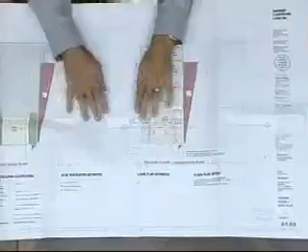We did a couple different stop gap measures. There's a section through here too that also helps explain it, but we met with the landscape architect, Chris Gillian, actually, who's in my building, and he specified the plants for this area on both sides, and there's an additional little lattice wall here that'll help aid the plants as they grow and potentially serve as an additional screening measure.

The shape is basically the same. This shows that the distance from the property line to the edge where you could basically stand is 10 feet 2 inches. The centerline there, that dimension shows 15 feet. That's the setback per the policy guideline that you guys all know about.

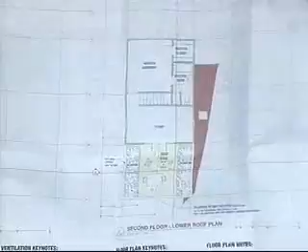Excuse me while I turn. So as you can tell, this is the rear elevation and that is the side elevation, which faces the closest neighbor affected by the setback. And here is the planting area with the plants. These are just CAD drawing plants, and the wall shown there.

The railing then comes across. The two side walls are just simple walls with the lattice over them. I got rid of the extra railing wall part of it. The lattice could aid both in view restriction, both directions, and potentially for any vines that we might want to grow while the other plants are growing, or in addition to them.

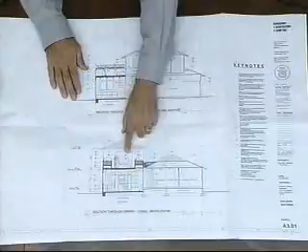But I don't think we need to have the vines at this point. I think the plants themselves are really attractive, and I submitted the pictures of the plants in addition to the names. This section here basically shows a person standing here. There's the lattice, number 18, and the plants up at that level.

Can you say the names of them so I don't... Phormium tenax palmatum, that's the main plant. I think it says 2 to 3 feet high. They're basically a natural-looking xeriscape type plant, surrounded by Arctotis sunspot orange. So it'll be kind of a very natural-looking planting, which actually matches the planting in the rear yard as it is today.

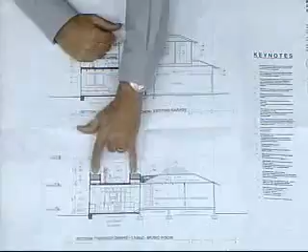So we are putting them on both sides, although this is really the only area we've been talking about the last couple of weeks, to keep this sort of symmetrical off the existing doors, which are located right there.

And this is part of, do we have a plan in this set of drawings, or is this just... That was all he did, I just put his notes on here, and on that page you saw previously.

Anything else for your presentation? That's it. We didn't read the minutes, but effectively you were asked to provide additional information on screening and landscaping, which is what you gave us.

So at this point I'll open up public comment. Is there any member of the public that wants to comment on this project? I don't have any slips, nothing in the files. That's to refresh our memory. Okay, we'll close public comment, and I'll read the minutes.

This project was here two weeks ago. It was continued two weeks to full board with the comments to provide additional information on screening and landscaping proposed at the west side upper level deck. That was really the only comment, we just needed some more information to evaluate it. So I believe we got that. I'll open it up to the board for their questions of the applicant.

Jim? I think, what is, you're calling it a screen? Is it a louvered screen, or is it something a vine can get inside and grow up? It's a lattice. I think I called it out as 2x2s with a 2x4 top and bottom.

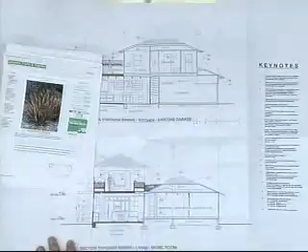Let me see what it says here. 35 centimeters, what was it? 35 centimeters high. Anyone want to translate that? Oh, 35 centimeters is tiny. Yeah, it's really a tiny plant. So I don't think that's... well, that doesn't look like 35 centimeters.

That's why I was trying to figure out how high the barrier was. If you can see right over the top of it, it's to keep you from looking down onto the neighbor's backyard. That's why I designed it as a 2x2 lattice. You can see from the elevation in two directions - when you stand here, you can't see through the lattice in that direction, or vice versa from down below. You can see kind of through it, but you can't see down because of the proximity of the on-center spacing of the 2x2s.

Anybody else? Anybody else? It does say it gets larger later as it grows. Aaron?

I think they've done a nice job with the lattice guardrail. The type of plant I think would be right about there where you could kind of see over it, kind of see through it - sort of a partial screen. So it's 30 inches tall, 24 to 30. What we're trying to prevent is a downward view. If it's right at that level, it should prevent you from looking at a downward angle, and you're pushed back it looks like 6 feet or so from that screen, so there's already an angle established with that sidewall. I think it's acceptable from my point of view, but barely.

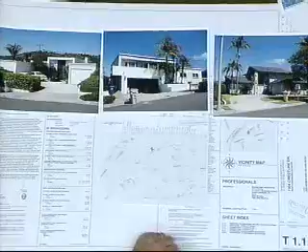That one, which is lovely. I'm just going to, if everybody's looking on here, I can overlap, it's better too. There seems to be a wide variety. I tried to pick all the either mid-century modern with a gabled roof and a large overhang, or flat roofs. Okay, it goes on and on and on.

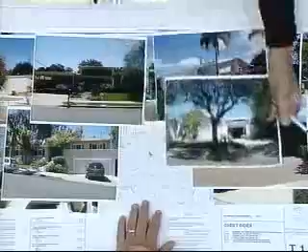Mr. Miller, didn't you ask for this? I did this just for you.

So this last one is, I'm glad this one was last, because this is kind of the direction that we're taking, only I think we're doing, in my opinion, a nicer job of it. Okay, so that's that issue.

As far as the detailing, I brought in some preliminary details, and they also show a couple of the parapet wall details. If you go to the elevations, I want the colored elevation to be over here. Brian, if you could move that one down. Not that that's the color, but I'll go over the color differentiation in a second.

But on the second page of the elevations, I took off the trim at the top of the parapet because I just thought it would be cleaner if we didn't do a cap trim and just keep it real clean. So that's one change I did make, and I just want it to be a clean plaster detail to the parapet. There was a double line here before, and an extension, not a crown, but a very simple rectangular extension that I think would be cleaner without.

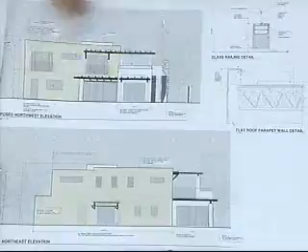This is just a preliminary, these are preliminary details, but I'll show you a photo of this detail. It's where we have the 12-inch glass railing over the plaster wall on the front of the house, and also around the side of the house. And now might be a good time for me to show you.

This is a house we just finished in Montecito that has some similar detailing. And this was brought up when I came in before, about somebody maybe not quite seeing my vision for this house. So I called this particular style, for lack of a better term, a Beeson contemporary Mediterranean. It's a flat roof Mediterranean. So the detailing of the trellises is very simple and clean.

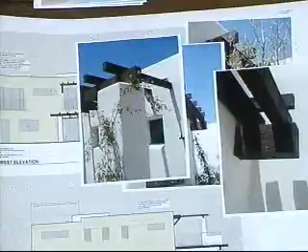Here's one that would be similar to the type of detailing that we want to do. And maybe, Brian, it was you that asked how do I visualize what inspired the detailing? I can't remember who it was, but I think it was you. Then here's one where the plaster columns are just very simply detailed with a bullnose. And the eaves, this one has an eave that actually cuts in, but mine wouldn't, it would be a bullnose detail at the top.

Here's a detail looking down at that trellis. And here's a kind of a typical wood railing with a brushed stainless railing and support. This is an example of if you'll notice, I have folding door units that go back. And then so the back of the house would be a folding door system like a lift and slide or a folding door system, and it would be a dark brown to pick up on the brown of the trellises of the stain.

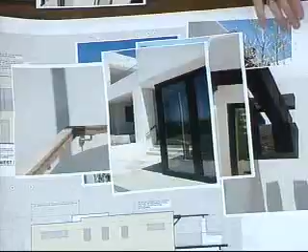This is a detail of how the track lays into, in this case, a stone wall, but in our case it would be a plaster wall. It's a real clean detail with a space between, and then again a real clean rectangular brushed stainless cap. Here's a close-up of that track, and then here's a close-up of the end of that detail, of how that works. So this is the direction that my final details will go. I hope that answers that question.

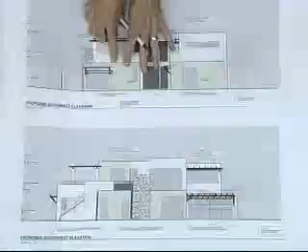I was looking at different ways to break up the plaster color, and I thought there was an opportunity, not with yellow - it just didn't print right. What I picture for this color is a mid-tone, cooler, earth tone brown, not a warm muddy brown, but more earth tone, not real dark, just a mid-tone range, offset with white.

But I kept the center section as a full, dominant white piece. This is an opportunity for my garage element to wrap.

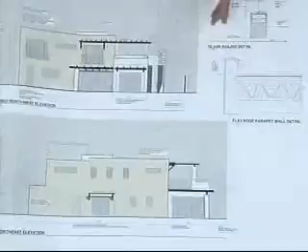As this garage element wraps around - this is the front - as it wraps to the side, it can pick up on this and kind of make this side of the house disappear. As it comes around to the back, it's the same corner and it wraps, then ends where this piece pops out again in white. So the front would be a combination of darker and light, and the back would be a combination as well. The darker tone might also make the house not appear so large on the lot.

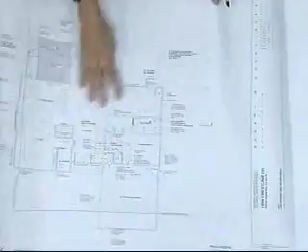What else can I say? Oh, the back elevation - since we're here, before I had shown you a couple of trellis details applied similar to these on the back of the building, and some board members felt the back was a little stark, so we introduced a trellis element at the corner, picking it up from the upper level deck and extending it over this piece in the same line. This one was always here, but you can see on the plan that we picked it up here. It also makes a really nice transition because all this area opens up, so now this becomes an outdoor dining room that all flows together. It worked out really well for us.

The only other comment, I think, was that we expose the corner instead of having a wing wall here - that element from the front - we expose that corner of the deck for the master bedroom. I think that was it.

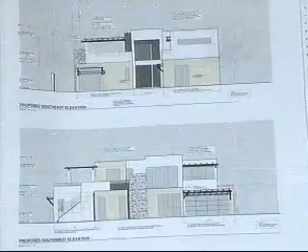What's the thickness of the walls? Are you rolling the plaster in? Will we have the windows, like the long strip window there? It's an existing wall, and we're just going to be retrofitting new windows - there's not a lot we can do there, but we're going to do the best we can. We'll get a bullnose, but it won't be a thickened wall, a really thick wall.

Duncan, are those details applicable to this project? Yeah, they're preliminary, but I can show you the direction of the lighting - step lighting, downward facing, up under the eave of the second story above the entry would be a recessed fixture, and then on the back, a downward, real simple anodized aluminum, dark to match the windows and doors, and stone veneer.

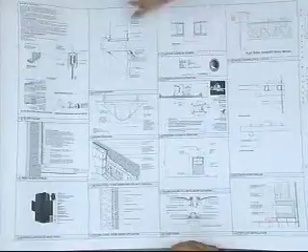The windows are just a standard thickness, so they would basically have to reframe this whole house if we were going to get a double thick wall, and we don't - they just can't afford to do that. But is it just a bullnose edge on it, or? It would be a bullnose, and we'd set it back as far as we can. Okay, yeah, it's flush to the interior.

Scuppers - that shoe for the railing, the preliminary detail here of the roof - even though I'll have another detail at the base, an overflow scupper, I have that detail. Also, we did it on here.

Additional questions, Aaron? Yeah - what were you thinking about the window trim color? The dark brown, to match the trellis. Okay.

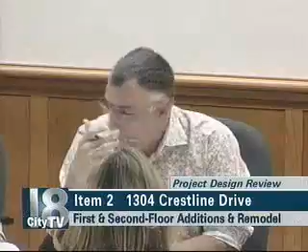That second floor deck tends to recess back with the building wrapping around it, so it'd be different if it was projecting out. I think it works very well in plan. All right, thank you.

Anybody else? I agree. Denise? Okay, I agree. I think it's a good building and an improvement over what it is, and it definitely has precedent in the neighborhood. I agree with the majority of the board. I think it's a successful project.

I think the applicant has done a good job of refining the design, and I'd be looking for a motion, hopefully for project approval, or another motion. See how that floats.

I'd like to make that motion. Yeah, for project design approval. It wasn't very convincing. Okay, I was waiting to see if anyone else would.

I'd like to make the motion for project design approval with the comments that we will await the Tier 2 stormwater management and see how that ties into the landscape plan.

Okay, making findings for NPO? And I'll make findings for NPO that the quality of materials, the mass, bulk, and scale is appropriate to the neighborhood.

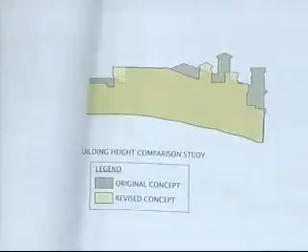The overall natural grade at the south elevation—what we're doing is proposing to raise part of that southeast corner about 12 inches in natural grade.

Can you actually point to the things you're talking about? Because we're not seeing any of the diagrams that match what you're describing. Do that right now.

Starting at the north elevation, what we've done is re-looked at the proportions of the north entry element and studied the horizontal line at the ridge. Those are two items that were brought up. We talked about bringing down the mass at the northwest corner of the building so it wasn't so imposing on the neighboring side. So those are the items that we looked at and reduced.

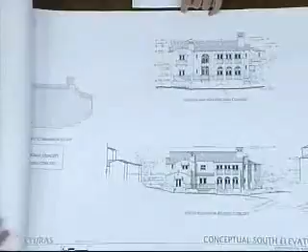I want us to focus on the south elevation. I think that's the elevation that really was being looked at last time we came through. So what I have is at the top the elevation we brought forth last time we met, and then the revised elevation below.

What we've also done is a site visit once more, and we took some grades off the existing neighboring property and illustrated what those approximate finished floors were for those grades, just to give some relevance to how the house would sit on the site relative to scale of the neighboring properties.

But some of the things I was talking about was taking the two-story gallery space and breaking that down, providing some relief at the lower level by providing a roof line—stepping back this element here on the upper floor, to here.

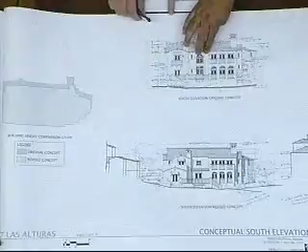The other thing that we did was reduce the amount of deck area at the southwest corner to give a bit more privacy to the neighboring property.

We've also looked at the two-story face at the southwest corner. That was another area of concern, I thought. What we've done is try to step back the southwest corner—you'll see it in the west elevation as well, how that is articulated. But I think it gives a nice facade for the neighboring property to look at. Primarily, it's looking at a one-story face in that section, and I think we were successful in doing that.

And then lastly, the item about raising the natural grade. I think the other thing we were looking at was making sure we didn't end up with too much exposure at the base of that foundation. So we looked at potentially raising the natural grade at the southeast corner up a bit, about 12 inches, just to get that corner—I think that's the corner that's probably the most affected in terms of exposure. So raising that up, using some planters in that section, just to try to bring down the scale as well.

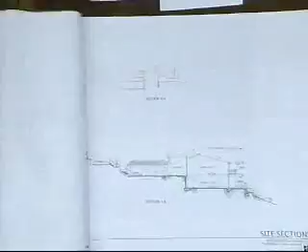We talked about the north elevation. We've also provided a site cross section in the drawings to give you context of how the home sits. It's section B, showing how far down the site we're locating it and its relationship to the elevation of Las Alturas Road.

In terms of visual impact, the home sits far enough away to provide privacy for our client while still maintaining the views. Lastly, we put quite a bit of research into neighborhood compatibility, which you'll find in the last three sheets of the set.

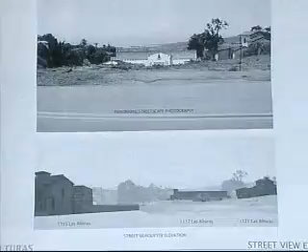We looked at updating the silhouettes you've already seen regarding the neighboring properties and what we're proposing. We did more research showing the footprint of the home relative to the site property boundaries and the FARs of the neighboring properties. We went onto the county assessor's website, took the areas presented there, and plugged those into the FAR calculator your city provided, giving a glimpse of compatibility.

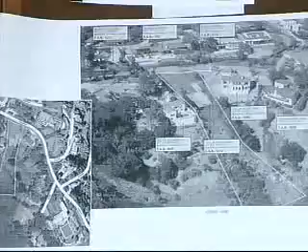One thing that stands out on downhill sloping lots is that the slopes are severe in some areas, which forces the design to be as compact as possible rather than spread out, so it can actually be built. The slopes range from about 30-40%, so we tried to avoid a footprint that was too large, which would require a lot of stepping on the building.

The next sheet shows another perspective, primarily focusing on the three homes where neighbors had concerns last time. For example, the neighbor up on the hill was concerned about whether he'd retain his view with our proposed home, but you can see his view actually gets better. Looking at both 1105 and 1121, those neighboring sites, and the compatibility of where the home sits relative to those properties, I think we've done what we could to make it compatible.

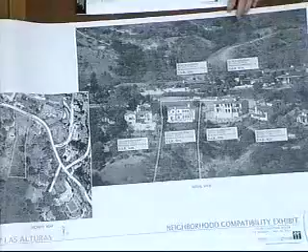Lastly, we superimposed the south elevation with the revisions to show the two-story face as a bird's eye would see it. This really faces the ocean, so the pedestrian view is mainly from the north on Las Alturas. I think it's very compatible, and the FARs are consistent with the neighboring sites. I'll leave it at that, and I'm here to answer any questions. There's a lot of information.

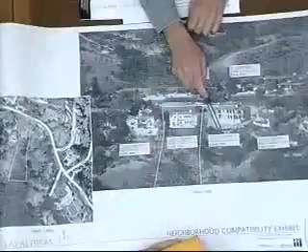Thank you. If I can take two seconds to finish up the square footage, we've reduced down to 4554, which is lower by a couple hundred square feet than both of the adjacent lots. I know that may not be ideal, but we are interested in being compatible with this side of the street because of the lot sloping down. Our client was very interested in primarily single-level living, with a master bedroom on the main floor, a great room, kitchen, dining room, and a library. Below that is square footage for secondary uses, but really you're trying to design the best first floor possible, and then underneath you can reduce square footage, though it wouldn't necessarily reduce the FAR. So really we're just trying to design the best home for the lot.

We've made efforts to address the comments that were brought up last time. So thank you, thank you very much.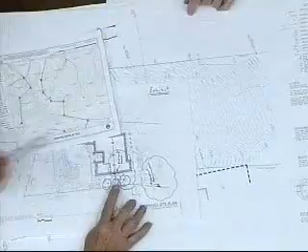If you could just continue your comments. The easement documentation they now have on file comes from 1121 over to 117, and it comes under the building envelope. They also have an easement for this section of the pool wall here. One of our main concerns is having the house located so far down the hill really imposes on the pool area that exists here for the neighboring property.

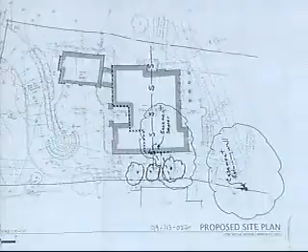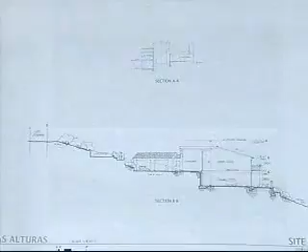So one of the solutions we'd like to see is just having the house move back up the hill a little bit. Also, if we go to section BB — it looks to me like this is the existing grade that's here? Yes, is that right? Yes. It looks to me like there's a lot more than a balanced cut and fill coming out of the property.

I think the new calculations show that it's almost a balanced cut and fill, at least from what I saw at a glance — I could be wrong. Okay, we'll check it out. Thank you, we're going to move to Gil Garcia.

Gil Garcia — I just continue talking on the same property and the concerns I have. Go back to that site plan we were looking at, or the site plan with... we saw a plan.

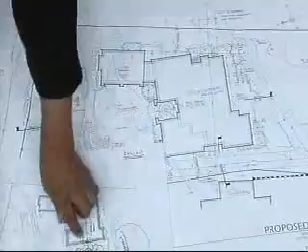They plan to come down here with the sewer line, I guess, from all the way from here, right, and go all the way down to here and back up. Hold on, we'll ask. Okay. And my concern is that there are some oak trees along here that are going to be almost eliminated by that massive grading requirement. Yeah, so they're coming out here, they're going to rip through these trees.

I'd like to have them also look at public works and bring you perhaps a feasibility study of that even happening, because we think this is only about 6 feet deep in here from a map I saw, and I couldn't see the one that came across here when it came down. But it looked like these might be 6 feet deep. If you go down here and then it drops dramatically, and then you try to come back up here, you may have to pump it up — I'm not sure.

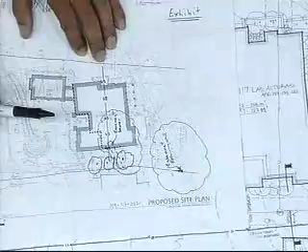To make that connection back up here again. But all of this in through here, this area is very steep, so you're going to be scarring the hillside dramatically, and that's going to be very visible from down below, a scarred hillside making that move.

So we think this is all necessitated by the fact that you're having to move this, but even the feasibility, you're going to this person's property, and I guess you've got permission, but they may have to go into this person's property. They were supposed to have talked to this person and never did. That was one of your recommendations. They haven't done that, so she's still waiting for a call and a sit-down to talk about these issues.

This is a major concern, and the grading continues to be a major concern. But I think the mass bulk and scale issue, even though it's less than this, the fact that you're building at the narrowest portion of the site gives it a very massive look. Look at the elevations again here.

Gil, you're going to have to wrap up pretty quick here. I want to look at the design of three projects together, because I think it's very telling. You want to see the last page.

This even has a higher mass bulk scale, but you notice how these elements popped out and make kind of a courtyard look—it looks a lot smaller. This and these two are a bad example of what you don't want to do, and to have one like this next to this, very vertical, gives a major problem.

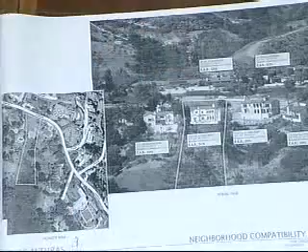All right, thank you very much. Is there any other notes in the file for public record? No? So we'll close public comment and move it to the board for their questions, please.

I think one of the questions is about this easement and where you are in the research of that and the legalities of that. Can you speak on that for a sec? Yeah, should we pull back to the site plan? You mentioned, I think, two easements from what I could gather. One is of course a sewer line easement. The second he mentioned was an easement for the pool retaining wall back here.

So the first issue on the sewer line easement, the topo we have, which we've had looked at several times, is that the manhole is on our property, and we have worked with the wastewater manager as well as looked at the heights of the manholes. By proposing to move the manhole down the hill, we have more than a 2% fall from this inlet to the adjacent inlet, so we won't have to pump, and we do meet the city's requirements for fall for sewer. I don't think we have a problem in terms of honoring the easement for the adjacent pool site, so I don't think we have any issues as it relates to the easements.

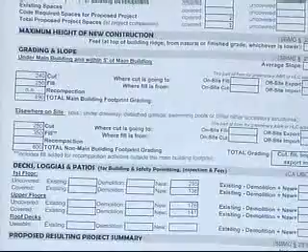There we go. 490 for the cut and fill totals as it relates to the grading under the main building.

Under the main building, and then 600 was a total cut and fill as it related to the surrounding site. Did any of those numbers include any work for relocating the sewer line? Those numbers included up to 5 feet out from the building line, and it included all of the grading.

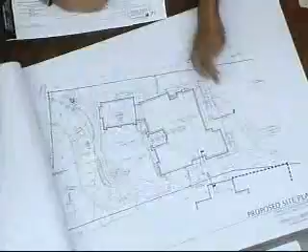The planters, the driveway. The sewer line grading, I don't think we're going to be grading as much. Actually, that sewer line runs parallel with the existing contour. If you look at the topographic survey, there is some grading that's going to happen there. So it's falling down, and this line here is running parallel with the grade contour.

What we've done is we've been conservative, and we've actually proposed a little bit more cut and fill than what we expect on the driveway side, just overcompensating for the overall grading. Let me make sure I understand your question. Did you mean the actual quantities of excavation and then filling back, or were you talking about moving of dirt?

Well, my understanding is that we are required to calculate any movement of dirt, both from construction activities and then change of fill and cut. So it doesn't sound like we've done the cut and fill for the actual excavation. No, I just basically went from all the planters on up to Las Alturas Road.

And then the third item is this oak tree. Do we have a survey that actually shows these oak trees? They're on the topographic survey, first item there. If you turn back one more sheet, there we go.

So what trees are affected by this, all the grading? Well, the easement that exists now, where the sewer manhole exists, is just proposed to be abandoned. We're proposing a sewer easement extension from that existing manhole down to the new location. So in terms of removal of trees, we're not proposing to remove any trees on that site.

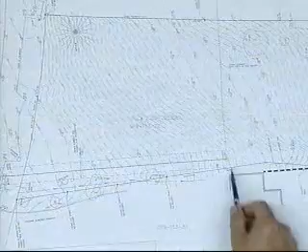Are these trees here? Those are, yes. What are they? Oak trees. They're not even labeled, the canopies aren't shown, they're not labeled. We'll get that done. Other questions from the board?

Sure. Yes, Aaron. On this section, I think it's BB, this is a long tree. There's a low retaining wall at the very bottom of the slope. I don't see that on this one on the elevation though.

This one right here? Yeah, the very low one. Is it, or the plan, would be the south elevation? Yeah. It's this one right here. This one. This also. Oh, okay. So those walls are only on both sides. They're not. Okay.

Additional questions? Bernie? Thank you. One is for Jaime, actually. So you had given us at the beginning of this presentation some things to think about, and now that you've seen it, do you think that we are going to be in compliance with the NPO now with this new plan, and did we take care of the easement issue with the sewer?

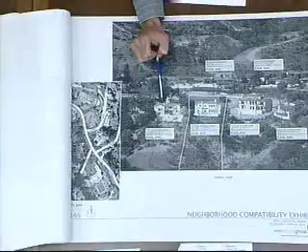Well, if you're looking at this picture, I'm pointing to the home to the left of the proposed residence. This is a home that was built decades ago. So I'm sure that was before your board was in place. 1920s. The home on the other side was a replacement from the fire, and from what I understand talking to the owner, it was replaced very similarly to what was there before. We're not here to say that because we're similar, we're appropriate, but they are existing, and it's important to look at the neighboring properties in terms of what's appropriate. If we built something very small, it would look small comparatively to the adjacent homes. I do think it's important to look at the adjacent properties.

Questions, Jim? I think it's important to contact the neighbor to the west and see what concerns she has. From what I gather, she's more concerned about relocating the sewer line, and I would like to see a drawing showing exactly where the sewer line is going relative to the oak trees. And then I'd like to see a report on what damage that would do to the trees, or whether you'd be able to do that without harming them. A report from an arborist? Yeah, okay, that was kind of a comment.

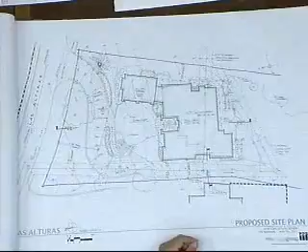Okay. What about heights? Is there... Mr. Chair, I think the main ridge, as viewed from the south elevation, if that were broken up, it would help a lot. It's just straight across there.

We don't have a roof plan, do we? P8. Well, but this is just a simple gable and then the extensions on it. I think the roof plan's on P4. P5. Looking at the overall site plan, actually. So I remember at the last meeting Paul commented there was a break in the ridge, but the design has changed now, so we've got to show that now.

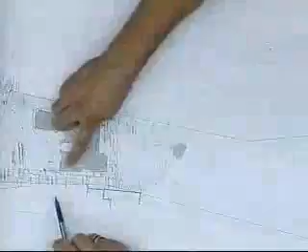But it's a step down, right? Yeah, so it's a main ridge though. You can see the roof's here, and then there's a small gable here, and another gable here at these two lower elevations, and the main primary gable here, and then it steps down. So we do have some stepping, about 5 instances where that roof steps. Okay.

Jim, how are you feeling, since I think you can analyze this volume a little more than Bernie at the moment? Do you feel that this continuous ridge is acceptable, or does it need addressing? I have no problem with the ridge coming across. I think that trying to break it up in some way might make it more...

Looking at the ridge more, I think it's low enough where I don't think it really needs any breaking up. I would agree with Jim. It has a little bit of a drop plate here, it's got a gable shooting in here, and it's got this other piece here that breaks it up, and it's already set low on the site, so it's not going to be in anybody's view angle that I know of.

Mr. Chair, I agree with you both as well. I think there's enough variation in the ridge, and it's lower than both properties on either side. So Jaime, I think that gives a little bit of clarity to the reduction of square footage, and maybe bulk, mass, scale reduction that could happen. I think the applicant is skilled, they've shown it in this project and other projects. We've been in front of our board, so I think he can do a good job there.

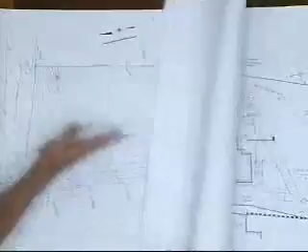I'd like to comment, because you were talking about the square footage. What I was thinking is this is a sensitive area right in here, so this is where I would invite you, reduction of square footage, your primary focus be in that area, specifically right in this area, because of the privacy issue and the oak trees and all that going on. The primary issue is going to be making sure we have a functional master bedroom, and yet at the same time trying to be more sensitive to them.

So I think you have it, and you have an indefinite continuance, so you're just going to put yourself back on the agenda when you're ready. Perfect. Thank you, thank you very much, thank you for everybody coming. I think there's a couple neighbors still here.

Thank you. So we're going to move to item number 4, 1417 Almond Avenue. This is a second concept review. The project was last reviewed on April 11th, 2011. We'll have some minutes here in a second, and if the applicant can come to the board.

Should this be pointing this way, or is that? I saw the don't touch, so I don't know if this can move. Okay.

So we're gonna read the minutes for this project. Denise, if you could.

Simplify the architecture and provide a cleaner and simpler architectural style. Reduce the size, bulk, scale, mass, and square footage of the proposed project. Simple and short, that's it, yeah.

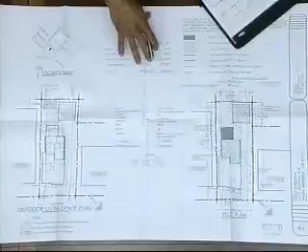So if the applicant could introduce himself and his presentation. My name is Cesar Cruz, I'm the designer on the project. To start off with the square footage numbers, we reduced it by 224 square feet, which brought us down from 104% FAR to 93%. That reduction was in the double cantilever, which was along this entire side and this back wall, which I believe was also an issue with simplifying the project.

As well as removing the double cantilever, we offset it further in from the first floor wall line, 14 inches, gave it a roof line that's existing to remain there to break up that second floor wall line, which is the same that we're going to have on the opposite side.

The rear of the property was removed. There was an additional offset here, which was removed to reduce the square footage again and to simplify this back wall.

Let's see what else we have here. There was a deck that was originally going to be proposed at the front of the property, which was again removed to just overall reduce the bulk of the size and scale of the project.

The garage, I believe an issue came up with the offset of some setback. I originally had it at 1'6", and a suggestion from the board was to make that a minimum of 3 feet, which was accomplished here on both sides to keep the cost of the materials down from combustible or non-combustible materials.

The hip roof on the second floor is a completely complete hip roof, which originally I had a gable end over here, again to reduce the size, overall size, bulk, and scale of the project. And then I'll go again in more detail on the elevations.

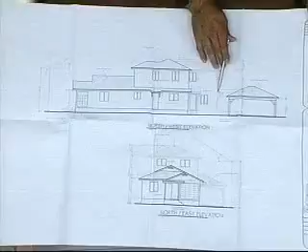Add some knee bracing here on the deck, which would also match or try to match a small roof element that I tried to put on this rear of the property to break up that wall line, and we'll see that on the next elevation.

Which would be here, just a small element there, just an idea I came up with to try and break that wall line up there.

This is the porch area that I just mentioned on the last elevation, which would be the entry. And then again, the offset from first floor existing to second floor proposed with the roof element there.

And I also, there's another entry on this property which I tried to incorporate the same design that I have on the back here with the knee bracing and to try and blend this whole thing together.

This elevation here, the only change that was done here was the reduction of the rear. The original design came very close to the carport, and that was the reduction done in that section there. Again, the same elements with the first floor roof line to break up the second floor wall line. And that's pretty much all the changes.

All right, thank you. I'd like to open up public comment. Is there any member of the public that would like to speak on this project?

Sir, is this for the next one? And is there any letters in the file? Okay, so we'll close.

I just wanted to bring to the board's attention, this parcel is located in the CP zone, which generally is a commercial zone, and we don't regulate fence heights as we would a single-family zone or other zones, where the maximum height in a front yard setback can't exceed 3.5 feet. However, this plan was referred to transportation staff, and they actually are requiring the fence heights to not exceed 42 inches in height along the driveways. So I just wanted to relay that to the board and to the applicant.

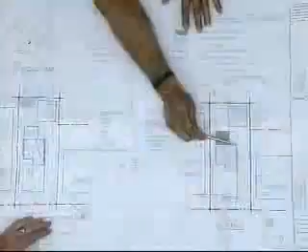Mr. Chair, is all of the driveway existing or adding? Majority of it is existing. We're going to be adding from the addition, from where the existing driveway terminates at the existing dwelling. Right there, and then this will be added from that point. That triangle piece comes out.

Right. Okay. What type of drive is it? That's just a concrete slab on grade, existing slab driveway.

Okay. Additional questions? Jim? So you'll have to get a modification for the carport? No. Because it's a zero property line. Zero. So you're setback able to build. We can go all the way to zero.

I've moved it to 3 feet. Okay. You still have to maintain this setback over on the 6 feet side? Yes. Okay.

Question, Bernie? The carport that you've got proposed, is that a standard size, the proportions and 18 by 20, everything? Yes. Because it seems a little bit on the thin side on the post. Yes, it is on the minimal, 18 feet. So it is the smallest that we can make it.

The post or the overall size of the post, carport? The support. Oh, yes, we can. Yeah, we can definitely increase that. Yes, it's not an issue with that. We can add a little more.

Mr. Chair and members of the board, I just wanted to bring to attention mostly the applicant in response to Bernie's comment that if you do make any alterations to that carport, transportation would have to review it again for maneuverability.

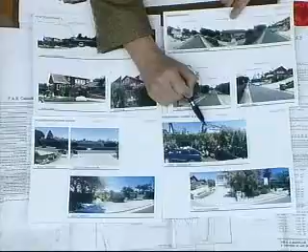Looking west, this is the west neighbor - there's a 2-story residence. There's so much foliage there, everybody's protecting their views. And here is the neighbor to the east, looking up the street. This is the house we were out in the street looking at - this is the residence we are adding on to.

If we're at the driveway looking south, there's a single story directly south, and another single story directly south, and then southwest, single story.

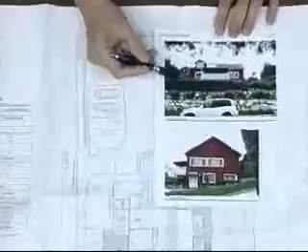From the street, looking directly at the house, this is what you see. Basically, you see the top, the main floor - excuse me, the middle floor is the main floor - and then the top floor, which has an existing bedroom and foyer, and a dormer in the bedroom. This would be the third floor we're talking about? Exactly. The main level being the second level. This is the east side of the house.

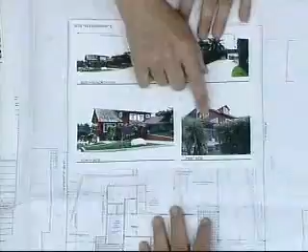Let's see, do we have... what else you got here? Okay, yeah, here. This is the west side of the house, and there's an existing deck, with a lattice to provide privacy.

The lot is 116 feet wide. The proposed veranda, which surrounds the front and the two sides of the house, is 31 feet 4 inches from the property line on the east side, and on the west side we're 17 feet 4 inches. This is the location of an existing deck which we're going to rebuild. It's permitted? It's permitted, okay.

We want to add to the master suite - this is going to come out about 2.5 feet. We've got about 4 feet here and 4 feet in the back. We're going to add a laundry and storage area in the back, and a new entrance with a stairway coming up to the veranda. The veranda is 5 feet deep along these sides, and then we have a 6'8" addition by about 14 feet, I think it is, entrance on the first floor.

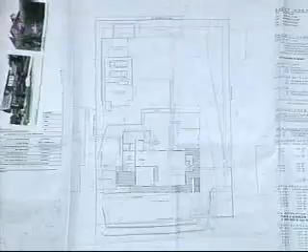And is this an existing deck that's being removed? Yes, that is the existing deck that you see here, and it is being removed. Okay.

This is the main living area, showing the veranda, the entrance. This is the existing master bedroom. We're going to be remodeling the kitchen, and adding on to the master suite. What you see here in the shaded area is what's being added - we've got about 2.5 feet here, and it's about 4 feet here. We're adding the storage and mudroom here on the main level.

Because they actually access it from up above where the garages are, this is the main entrance for the owners. It's never had a front door - can't find a front door. So hopefully we're announcing it at this point with the redesign.

The upper level consists of an existing foyer - we're going to turn that into a study. There's an existing bathroom here, and there is one bedroom.

My clients are in the process of adopting children. They want to add another bedroom. That is the purpose of this bedroom, it's for the new child.

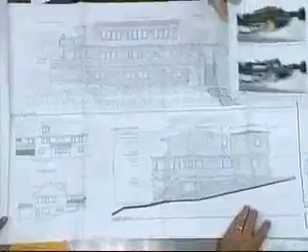This is the demolition plan showing the existing. The downstairs, there's no change to the downstairs. Here is a 3D simulation, from here to here, we have the existing structure and the proposed structure.

Wayne is a builder. I've known Wayne for 25 years, and he loves the craftsman style. So he wants to take the barn look away. And we'll be adding this clerestory, which is going to add additional room for the existing, where we have the dormer now, this bedroom. And it will be providing additional light into the living room and the foyer.

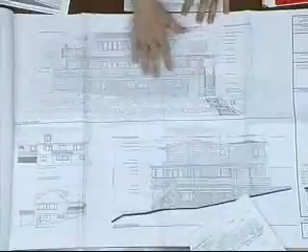This is the veranda going around the house. We haven't really changed the size of any of the openings in the existing structure, other than eliminating some windows on the side where we're providing the new entrance. And here you can see the new entrance. Yeah, the new entrance here at the middle level.

This is the roof of the new entrance. This is the existing roof line of the structure. Actually, it's like this, and we want to pop this up. This is our new clerestory along the front, and we'll have a bracket here to hold sun control, the trellis.

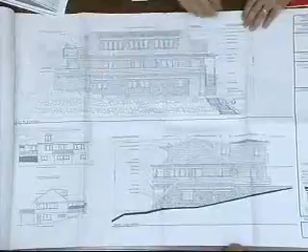We'll be using Shakertown stained cedar paneling and either Eldorado or cultured stone, ledge stone with an actual grout joint.

Going over to the west side, you can see this is the existing roof line. This is the additional bedroom in the back of the structure with the deck at the side. This is the existing deck that's going to be rebuilt, and we've extended the handrails around to the side there.

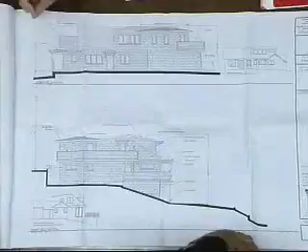This is the north elevation, what they'll see when they come in. This is the door, this is an existing doorway. We're going to be changing the sheltering device above to a little rake roof. This is the new entrance, and like I said, this is the new bedroom in the back.

There's also the deck on the side. This is the deck and the side. So that's at the third story. Let's see, anything else? That's a quick run through.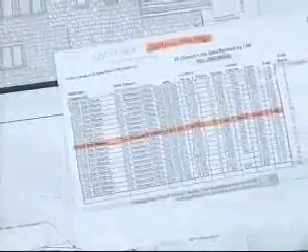I saw an FAR chart, I didn't get to read it, but is there kind of a synopsis of where you are? Yeah, the existing property is at 0.22. The average for the area is 0.24. But the proposed project is 0.26. So the numbers we're looking at here are the existing? That's the existing, right. This would change to 0.26 for the proposed, which would move it up 2 notches, basically. Okay, they do have the calc on the first sheet. All right, yeah, thank you.

Anything else for your presentation? Not at this point. All right, thank you. One thing, my clients visited with all their neighbors, and I'll let them report what the neighbors said.

Yeah, everyone, if you could speak on the mic, I'm sorry. And then we need to put this on. Everyone that we were able to meet with, in the 10 closest projects and closest houses to the project, were all in favor of it. They like the concept.

All right, thank you, that's always a good idea to meet with the neighbors. Anything else? Okay, well, I only think that one of the neighbors, I think Rosemary was telling me, said it was an upgrade to the neighborhood because getting rid of that barn, and the material.

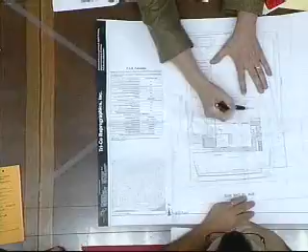And then how about open yard area? We have the open yard area — there are actually three places we could have it, but since the kitchen and dining are here, they wanted to extend the existing patio. We'll add about 500 square feet, which meets the open area requirements. There's also an opportunity to have it here and here, but we wanted to put it there.

I have a question — on the second floor, or I guess it's the third floor, is this area a two-story volume now? Would you call it two-story? Yeah, it's pretty tall — 23-foot high ceilings, I mean it's a barn. The ridge is right here, sloping down, and we're maintaining the same ridge but adding that clerestory.

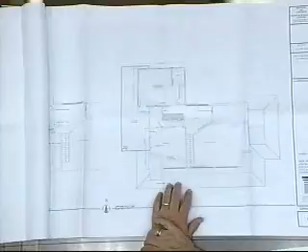Was the only purpose of adding this to get more space over here? Well, and to bring light into this space. And that's a big ocean view — since this is open, you'll actually be able to see through here. Okay.

Additional questions?

If I was a visitor, where would I park and how would I get to the front door? You said you had a problem with the front door. Well, the existing front door is here right now. People either wander up the driveway and try to find the front door. If they know the house, they park up here. Otherwise, this is all parking along San Miguel.

If they park here, are they going to come just through that door pretty much, or could they go either way? Well, they could go either way. Right, okay.

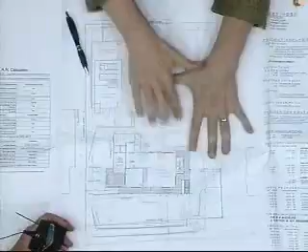Yes, Denise. So this is all proposed to be paving? Well, this is currently paving, and it's the patio, and we're looking at extending it here. Now, we haven't really decided what material it's going to be at this point. But it's just on grade? This is on grade. This has been cut, kind of scooped like this to provide for what's existing down there below right now. So we're going to come across here.

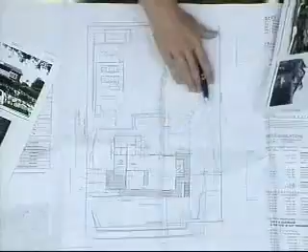Michelle, this project, is it going to be a Tier 2 level SWMP? Yes. Or not Tier 3? Tier 2. Okay.

Let's move to comments if we could, and try to keep them pretty big picture item, not looking at little detail yet.

Paul: Sure, I'll jump in. I'm looking at two items. One has to do with the dormer up above. I'm not resolved yet, but I'm struggling with the way this looks and how big your house is, the profile. When we basically move this over, it's beautiful architecture, but it's adding additional height and volume to the structure, and it makes this home look larger. What we're gaining is not additional living area, but just more interior volume in the house. So I'm having trouble rationalizing that, even though the architecture looks fine.

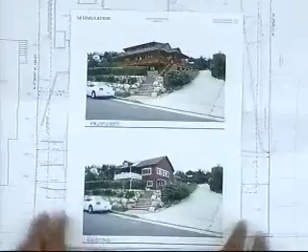The other issue I'm looking at is the shape of the roof for your second story, or this room in the back. This roof does not match all the other roofs. It seems a little bit out of place. There's another view of it over here. Somehow I think there needs to be better integration in how you go about it. That's your challenge, but that's what I'm looking at as being a little on the odd side.

Thank you, Paul. Those are exactly the two comments I was coming up with. Let's get our comments out, and then at one time we could do it.

Any additional comments? Aaron: I think it's a great style for the Mesa. I just think it's too aggressive of a project. It was a 2-story with a little bit of a 3-story element, and now it's just a 3-story. You could probably be more efficient with your interior space. The open to below is pretty big. So I'd just like to see it reduced.

Okay, Bernie, how are you following on this one? I was looking at the compatibility, and I think the style is compatible. I think it's really thoughtfully done with what's already there, and the beautiful landscaping in the front is great. But I do think it needs to be reduced. This neighborhood in particular is very sensitive. Marine Terrace and slightly over that whole area were the ones where the NPO really got started, and people are sensitive, and I don't think we want to be this aggressive.

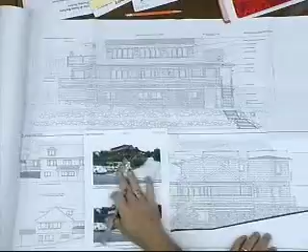Just remember, you're going to be looking at it like that. Yeah, okay, Brian.

I kind of liked it. Maybe so, I can see. I know exactly which direction you're going and aiming it, and I'd say maybe explore another look at the dormers above. Maybe that takes it off of something that looks like that. But that's about all I can say. I mean, exploring the dormers so they don't look so aggressive.

I'm feeling that it's because it's an AutoCAD drawing. That's why it looks kind of battleship-like, because you don't have the real feel of what's really going on. So you've seen the photo, and I love this photo. I think this is great, so I'm very comfortable with this. But like I said, maybe the dormers here are a little bit too aggressive, and they need to be softened. And that's about all I can think of.

Thanks. I wanted to point to another feature that I wrote down but nobody spoke upon. Obviously we have a big FAR, and we have all of this veranda area. We also have this deck on the side here that's a pretty good size, which nobody commented on. It's not about the view, it's far enough away from the property line, but it does add development to this design, and I'm not sure what the purpose of bringing it around the front would be. It's of no use. I feel like if this was smaller it would be better. It's a big project, so I think this is an excessive amount of deck off of that level.

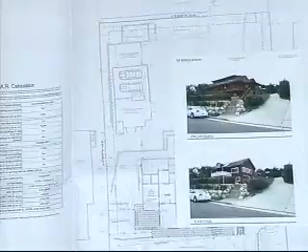Again, I'll chip in again on this dormer issue. The very first thing I thought of, and why I asked if that was a two-story volume, was if you put another gabled dormer kind of matching the one on that side, I think it will reduce the scale of the project down, and I think it will be more successful than the full shed dormer there. Front door.

Okay. So we actually have a project that we could take an action on. From the comments I heard, I'm not sure we can take a positive action on. Okay, may I ask a question? Sure, okay.

I know you were concerned about the FAR, although we're not as high as other houses. Right, and I could move that, like I said, I could move the retaining wall, and it would reduce the FAR to 0.98. So I want you to remember the width of this lot. It's almost 116 feet wide, so we have large setbacks for interior yards instead of the 6 feet. It's not really a common situation, I don't think.

Yeah, I think you had more support on the FAR on the board than on the bulk and mass of the project. So what I hear you saying is the clerestory and the deck, I mean that's what I hear more than anything. Is that... Mr. Chair? Yes, Paul.

Two items. If we stare at this picture and realize what we're going to see, this is the existing building, it is what it is, and I just feel like we're going to be making the roof larger, taller, more prominent. When it's read as just a simple asphalt shingle or tile roof with a couple of dormers for light, that's one thing. But when this becomes an entire clerestory across the top, it just reads stronger. And the whole idea is to keep these things, I hate to say petite, but a little more in scale. So that's where this thing kind of grows in proportion.

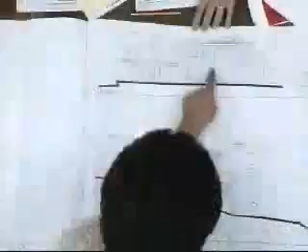Another issue, this is really minor, but on the back side, the articulation of the architecture, if we can go to the rear elevation—it doesn't need to be in the motion, it's just something that there's opportunities for when you design. You have a cantilever right here, and the roof I had a concern with, and then how this cantilever is supported, and then Glenn had a—I'm sorry, him.

He had a concern about this deck over here. But if I draw some board members' attention to this kind of condition, and then if we look on the other side, when you go through your next design pass, you'll see how to address this cantilever and this element that comes across, and that's all new construction happening there.

I'd like to throw in some positive comments too. It's a very nice design change from the barn. There's some really good details. And the addition of the veranda around will actually scale down the project some. It does add a roof, but it adds a lot of shadow, and it breaks down the mass of the major building behind it. So those are all positive things.

We haven't said take that out because it's massive. It's mostly the dormer element, I think, and maybe this deck. And again, Paul was absolutely correct about this roof. It's not 100% solved at the moment, I don't believe. I think, if I could just address that roof for a minute.

Sure. As you can see, the actual sloped portion of the roof is going to disappear. You will not see it. It's just enough drainage there to get the water off. So really, you've got horizontal lines that you're going to be seeing. And this is the existing roof. It has these weird roofs anyway.

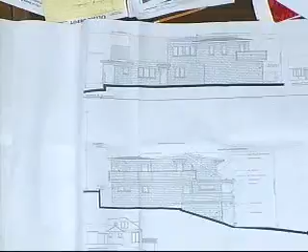Sure, from the barn, so I understand. It's like trying to get that to tie together. Can I say something? Well, I like this comment. I'll be the devil's advocate. In this particular style of roofing, which is a takeoff from Victorian architecture, this is a very common way of dealing with them. They have a lot of very shallow roofs, so it goes in keeping with this style.

Yeah, and the shed dormer does too. That's one thing that gives it the style, which it doesn't have any style now. Yeah, we're not trying to. The problem with the shed dormer is that it adds to the mass of the building more than the gable dormer would. Again, if you were at 80% FAR, we wouldn't be talking about the shed dormer, but you've got so many other elements and an FAR that we have to be a little bit more critical on you because it's a high FAR, and it has to be an exceptional project when we're done. And you're pretty far along that way because it's a very good design project.

May I also add that it adds to the apparent height from the front there. That's the part that bothers me the most. Yeah, the way that it's just sort of stacked straight up like that. Sure.

So, I think you've heard a lot of comments. I'm going to look for somebody to wrap those comments into a motion. And I have a feeling the motion is going to be returned with some revisions versus approval, from what I heard.

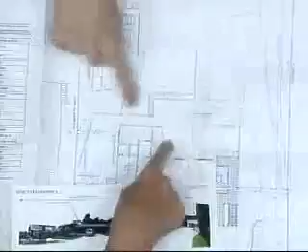It's a motor court up there. Is it? Right. But I'm not looking at the motor court over here, right? Right. So this talking is all about this landscape. This is all landscape. What is this in here? That's currently a lower patio area? Is this wall, that wall? Right. Okay, excuse me, no. Let's see, it's this wall here. That's what this wall is. So this wall, the existing, that's cut into the hillside. Right here. This is a retaining wall. Hard to visualize, isn't it?

But is it paving or is it grass? We haven't determined what we're going to do with this yet. Currently, there's a planter here, there's a planter all here. This is landscape. This is all lawn area here. So currently, Wayne, isn't there, it's about like this, I think, a patio, and then the rest of it's planter. So we haven't really determined what we're going to do with this.

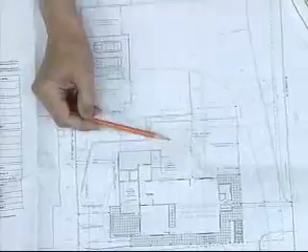Okay, well, we'll make that part of the motion then, providing more information on this patio. Is there a retaining wall feature in some part of it? Well, if you look at the elevation, it dies off. I mean, it starts off and it gets really deep, yeah.

Okay, so first, second, we had comments. We have our comments all over there? Okay, so let's take it as an indefinite continuance back to full board. We'll take a vote. All those in favor? Aye. Aye. Opposed? Any abstain? You have a unanimous motion.

Thank you. Thank you very much. Thank you. We look forward to your revisions. At this point, we have no other items on the agenda, and we will stand adjourned. Glad you liked it.